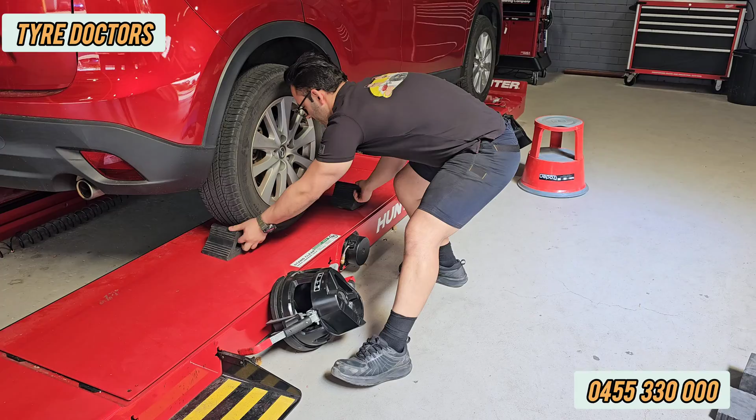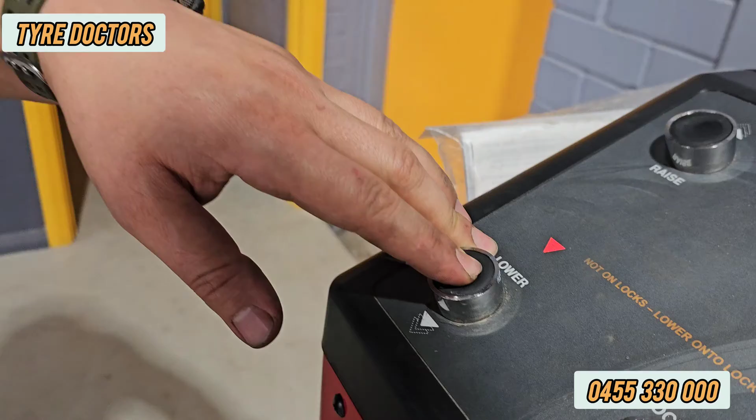Okay, now first thing you do, put the stoppers on a tire, so to prevent any rolling. That's great. Now we take the car a little bit higher. I'll show you how the remote works. So we need to raise it a little bit. You just press this 1, 2, 3. So on step 3, I press the lower, this one, to get locked. And it's level. If you don't press it completely, there will be an arrow here and it says it's not on locks, so you need to make sure it's completely locked.

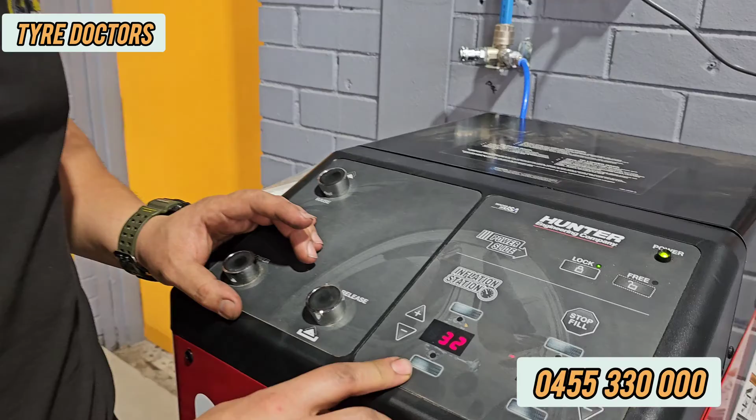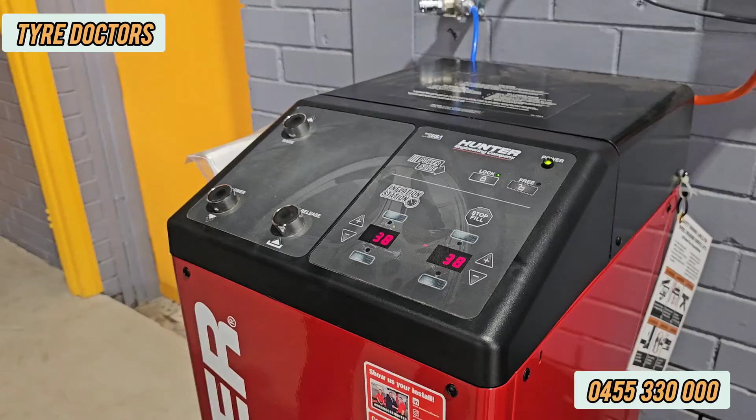First thing we should do now is the air pressure. So there's an inflation station here. So on this car we go on 38, for example, psi at the front and rear. Yeah, and now we have to connect them. It's really easy and handy.

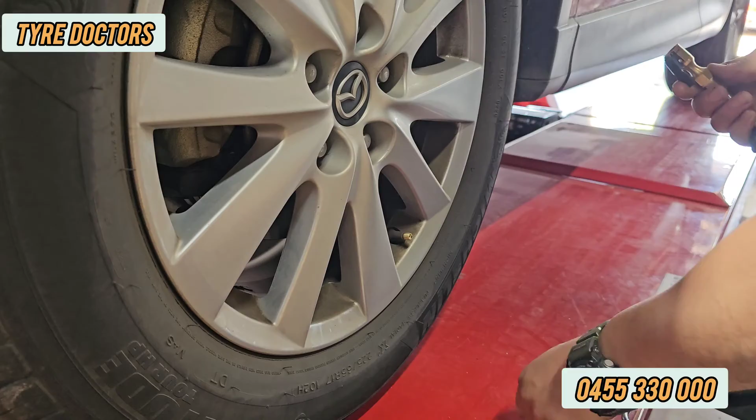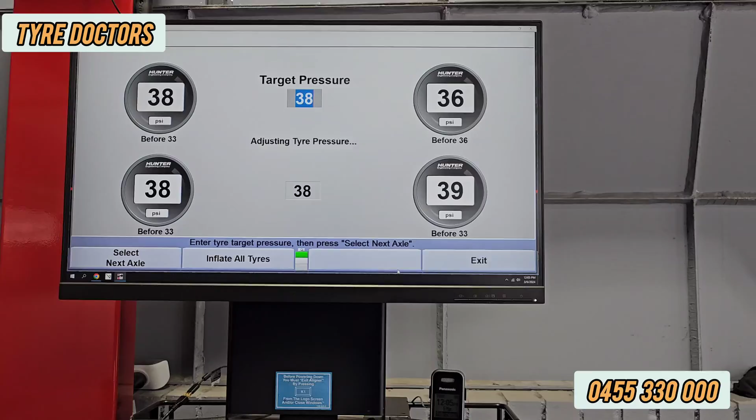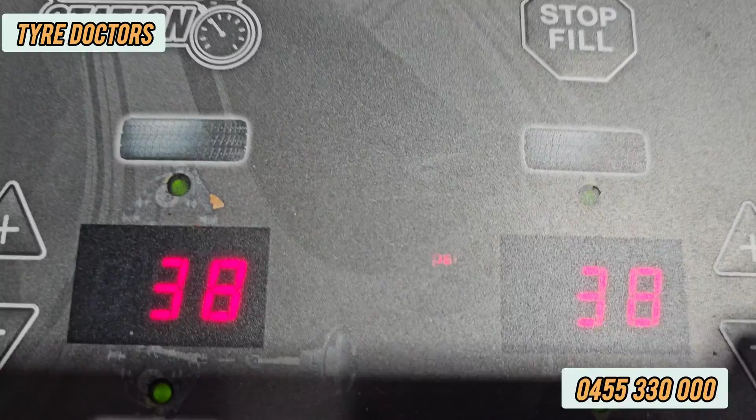Go to next. Last one. If you get the combination of Hunter machines, it will even show over there the tire pressure for each tire actually. When it's finished, the desktop will be like that, and even there's an indicator over there on a remote which shows by the light of the yellow and green. So when it's green, it means it's done. Now we take them off. So this one, you have to just pull it once and it goes in.

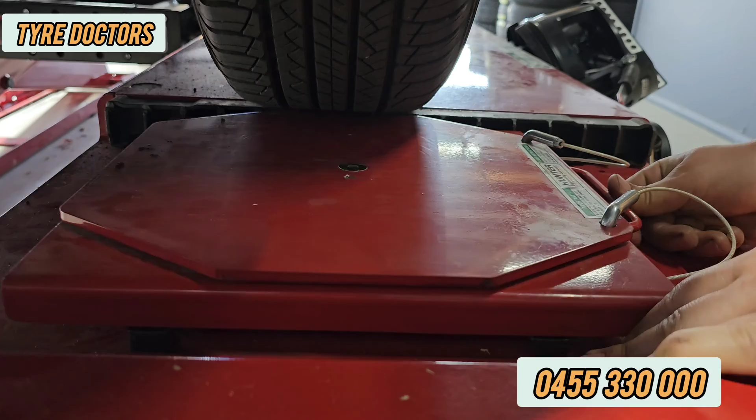Three. Plate positions. I didn't have the chance to get the automatic one. The rear is auto, but the front is not. And because it's not, I have to adjust this one. You see this one? Make sure you put that one at the center of the tire. Yep, and we do the same for the other side. That's it.

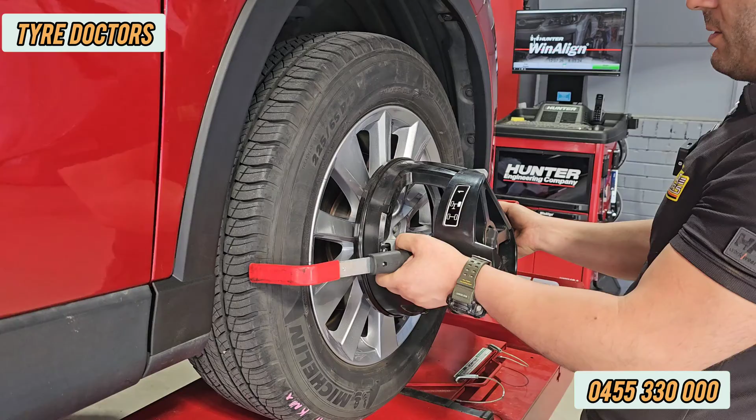Now we can put the cameras on. So for putting the camera, it's really easy. Try to put it at the center and straight. You'll get the better result. And the lock is easy. Just for unlocking, you press this one up. For locking, press it down. And make sure you put it on a gap so it doesn't come off. We do that for all of them.

When you lock it, make sure it doesn't move. If it moves, you need to tighten more, like push this one forward and put it at another gap.

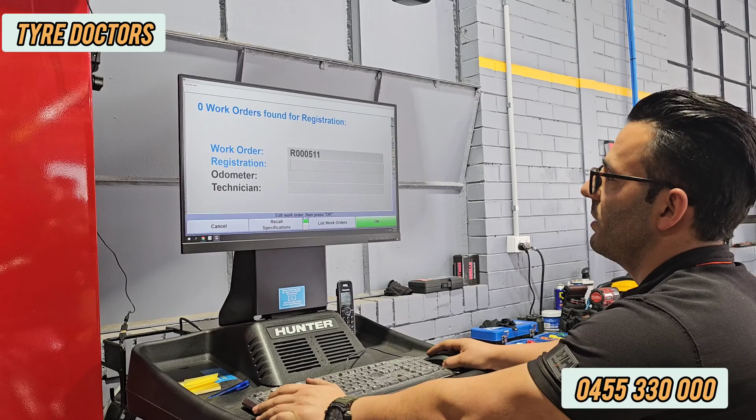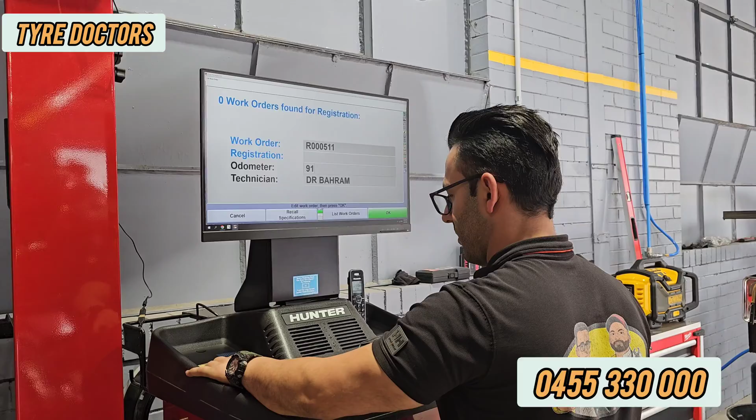Done. So it's the time to put the information on. So we press begin alignment. Here we have the registration, odometer and technician. Dr. Bahram. I am a doctor. We press OK, and then choosing the model, Mazda.

If I press M, A, Mazda is here. So we have two types of Mazda, which the second one is for America. So we look for Mazda CX5. CX5 is here. Press that. Now we check for the date. Date should be here.

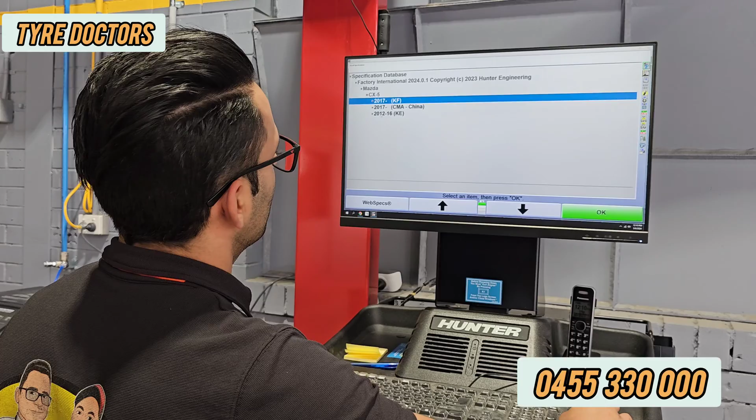The 2015. July 15. So that means we have three options here. So 2012 to 16. That's the only option we have. We open it. And now we have to make sure it's all-wheel drive or front-wheel drive. So this guy's a front-wheel drive.

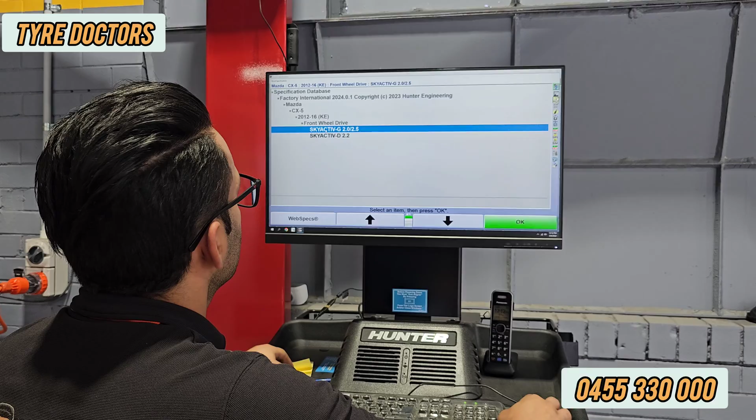Front-wheel drive. And now this one is a 2-liter. I choose this one. We've already done the sensors, the cameras. We press this. As you can see, we have a camera here as well, so that picture comes on the report paper showing that we've done the job.

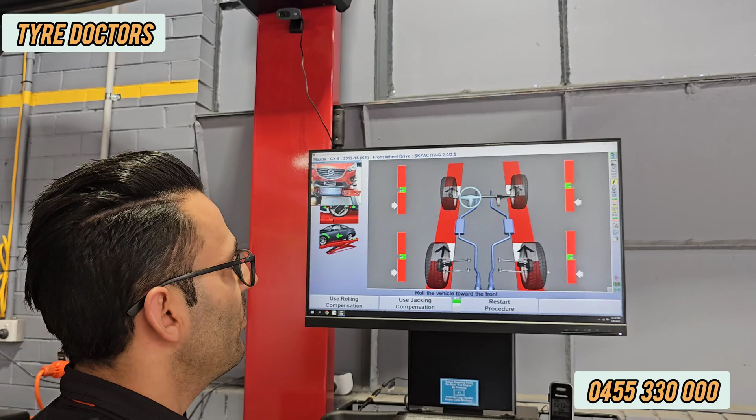Now is the time to move the car forward. Roll it forward. For rolling the car, make sure you use this tire, this wheel, and make sure you don't cover the cameras. So you take the top and here for rolling. So first thing, we take the stopper out. We put our hand here and gently we move it forward. Make sure the front tire goes on the center of that plate.

When you stay there, the machine will take a picture of the car and automatically it will unlock this one, the plate at the rear. The front, as I said, is not auto for us. Otherwise, that one could be unlocked too. We put the stopper back.

Now is the time for putting the handbrake on. So we open. As I said, make sure you're so gentle. I use that step, it's really handy. Press the brake pedal like that. We put it like that. It's locked now. Make sure you do the handbrake and put the gear in P as well. Now it's locked and it's on park.

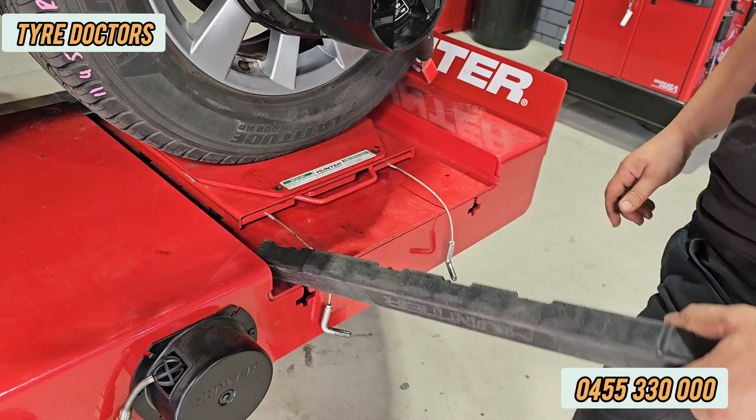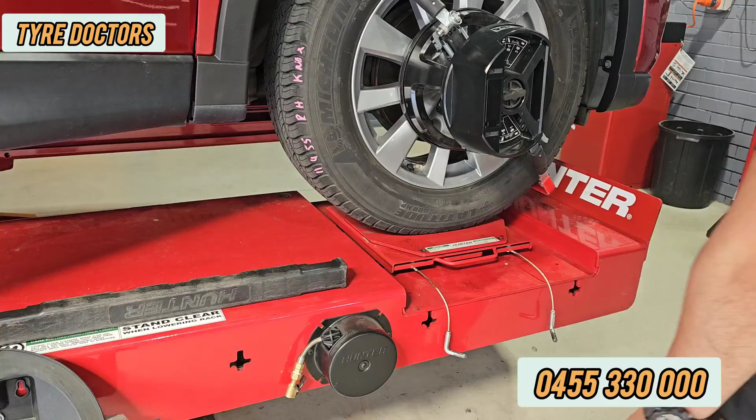So now it's the time to take the pins off. Easy. Make sure you take this black plastic one out as well. So when you do the caster and you turn right and left, if you don't take this one off, this one will hit that one and it will change a lot of things. We do the same for the other side. Take the pins off. Put this one. Time to do the caster now. So gentle. Do not move the car.

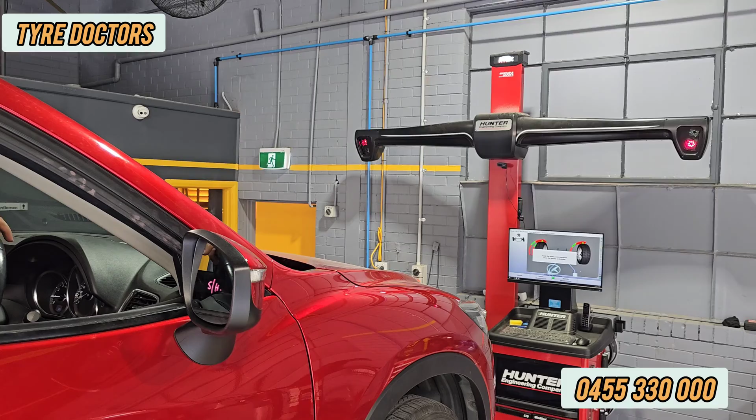So now we switch the car on. As we go with the machine, it says turn left to the green zone. We turn to left, to there. Now it asks for right. Okay. And now center. The center one is more sensitive. And now is the time to visually check the steering wheel and make sure it's straight. Now it's straight. Now we can switch the car off.

As you can see, the front right one is out, but we check everything after that. The front right one is not good. Now it's the time to lock the steering wheel. We got this locker here. Open the door so you can see how to lock it. So gentle. So we press it down on the seat. Make sure you don't move the steering wheel when you lock it. Now it's holding the steering wheel and it's locked. Close the door gently. Now we lift the car up.

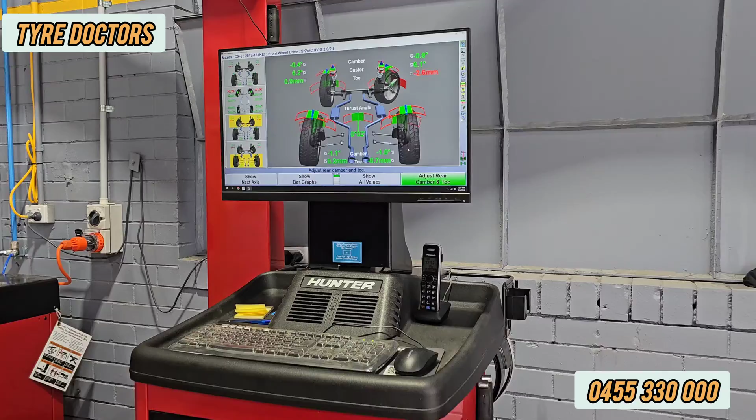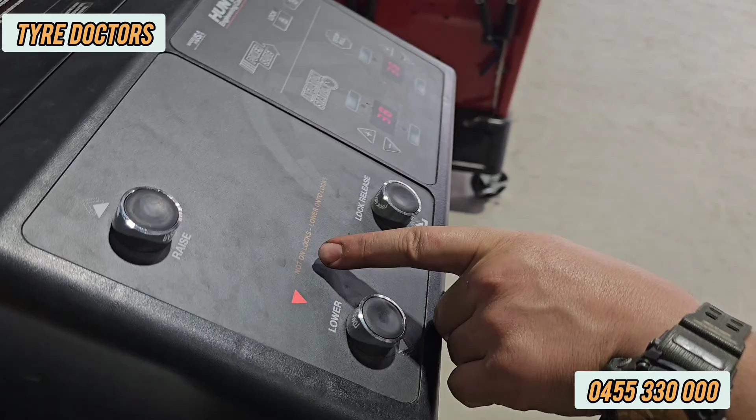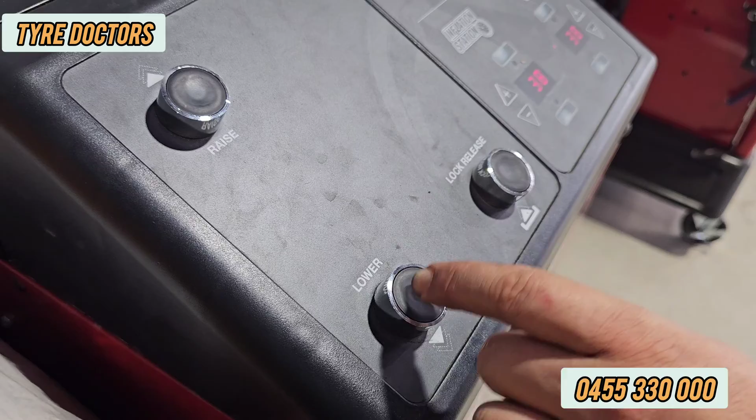Okay, now I've reached the height. If you look at this one here, the arrow, it will tell you not locked, lower onto locks. So that means we didn't lock it. We always have to lock it. So we press this one. Now the arrow is gone. That means it's locked and it's perfect.

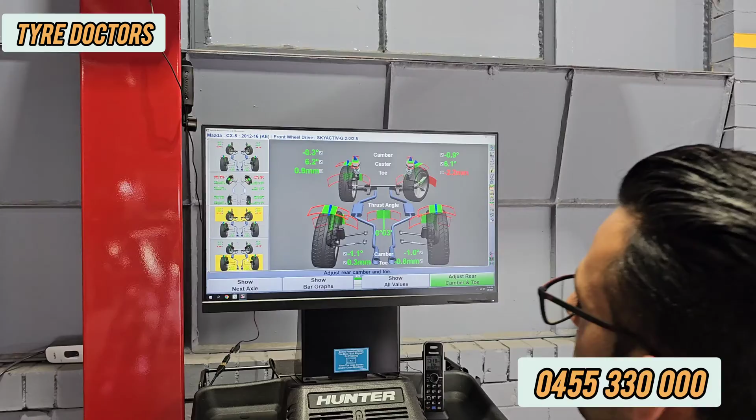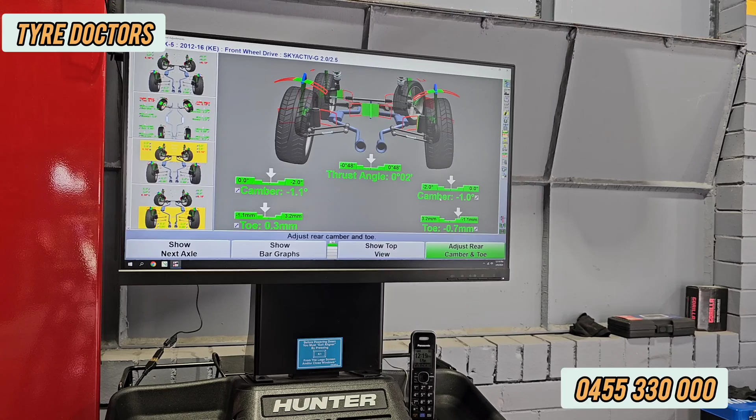First thing we do is the rear tires. So that's the total. We press this one. You can use the bar graphs as well, but my favorite is that one, to be honest. You can choose whatever you want, but I like this one. So as you can see, the camber is alright. The toe is a little bit out. I'll fix this one. The camber is out, but there's no adjustment for this car. Obviously, we can't do anything. But for toe, the center is here.

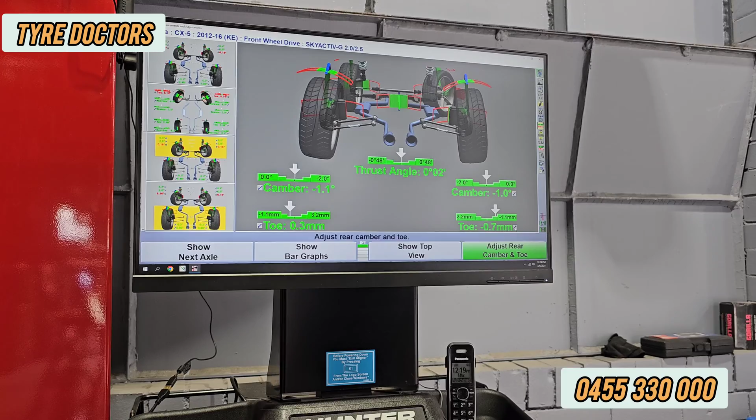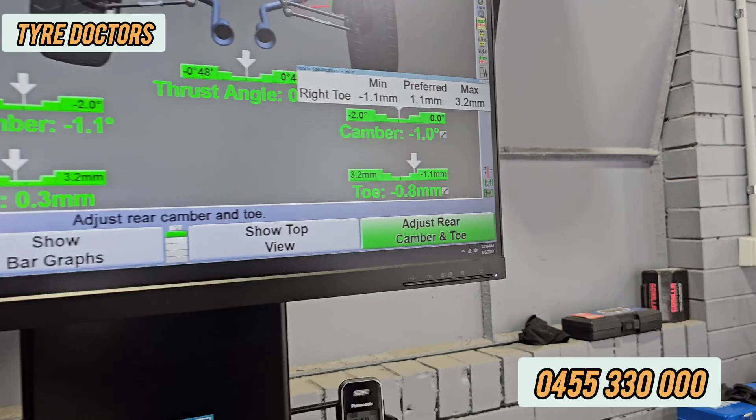I'll show you how to check the perfect one or preferred one. We press that tool here. When you press it on the top, it says show vehicle specification. So you click that one. And here it says preferred. Preferred is 1.1, but the tolerance is from minus 1.1 to 3.2. It's good, but it's just OCD. I love to do it perfect. So let's do this one at 1.1.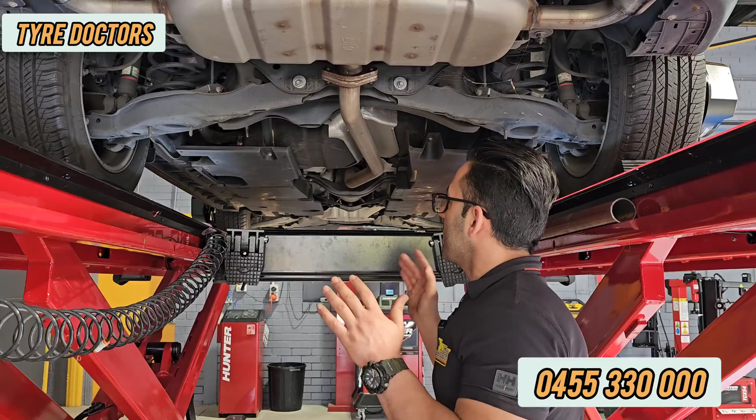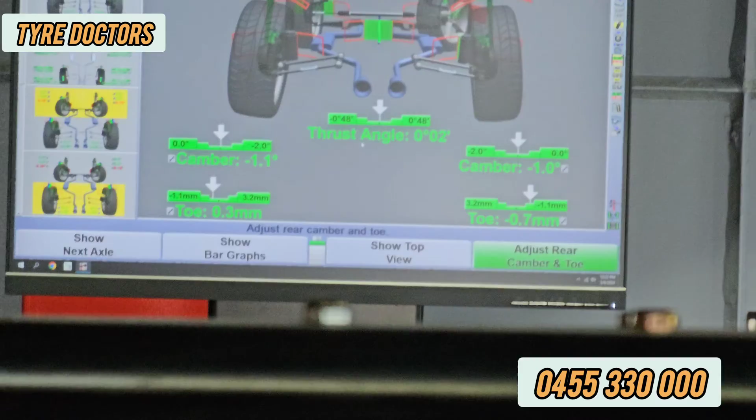Obviously this car doesn't have camber adjustment, but toe for this car is this one. That's for the left side, and that's for the right side. Now we open this one. 17. And we spin the other side to reach 1.1. As you can see, it's changing. Wrong. Okay, 1. We tightened it a little bit, not completely, to do the other side as well. Sometimes when you change the other side, this side will change too. That's why it's better not to tighten it completely. No.

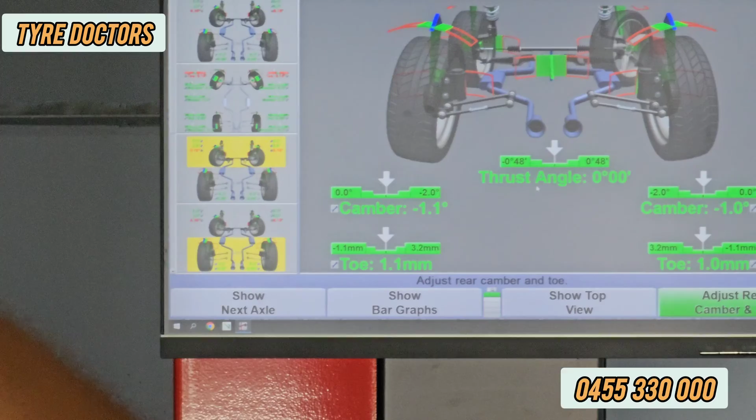Okay. 1.1. And we tie this one completely. That's good. This side is good too. So we tied this one as well.

One thing you should know is you're not gonna make it perfect ever. Not ever, sometimes it happens. But it's live and it moves. So 0.1, 0.2, 0.3 is nothing, yeah? So don't be so fussy. Now it's tied. So easy, we did the rear. We go to the front now.

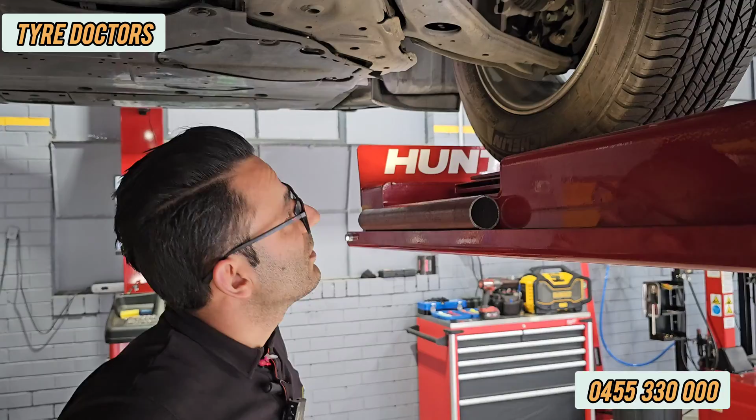For the front, that's the tie rod. So we need to open that one and obviously spin that one. Now we go to check the front. So we have to press the front now. So the rear is like that now. We go to the front. This one is out, obviously. We check the perfect one.

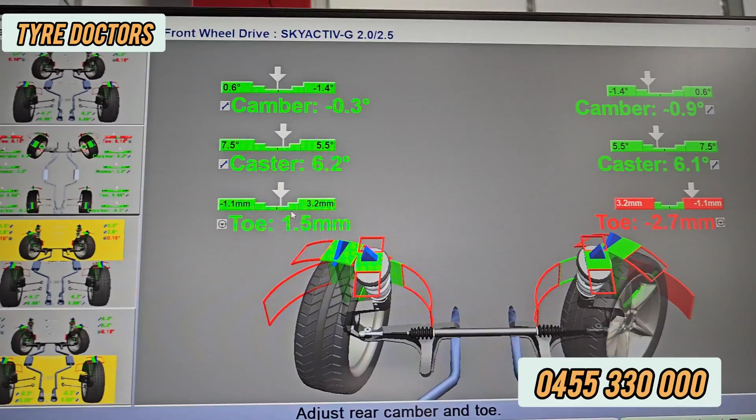It's 1.1 again. So we do this one first. Sometimes this one gets fixed. So let's see how we go. Okay, so we need 21 and 13. Okay, so we open this one. Try to not move the car when you open the bolts or the nuts.

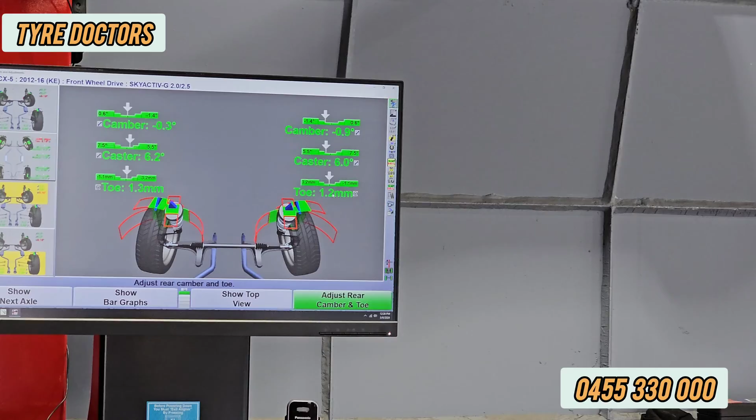Now we loosen this one and we have to turn this one upside. As you can see, it's turning. Yep. Now we don't have to open the other side. That's good. So if you remember, you need to always do the side that is worst. That will make your job much easier.

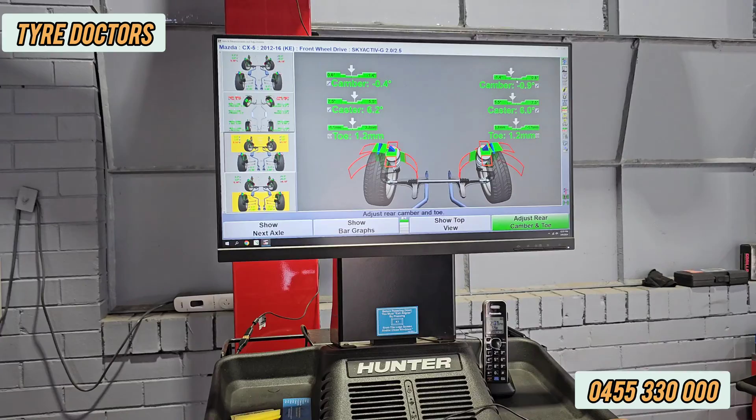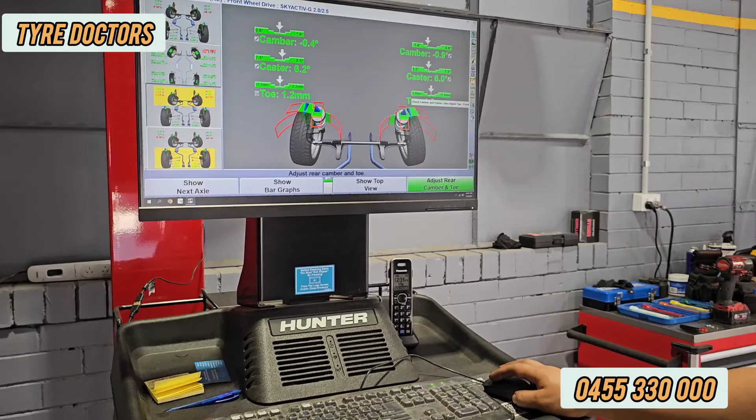Now, as you can see, it's perfect. So this car doesn't have adjustment at the front except the tie rod. So camber and caster, as you can see, I don't like it, but we can't do nothing. There's no adjustment for it. Now, it's the time for the last step, is the print. Show it to customer.

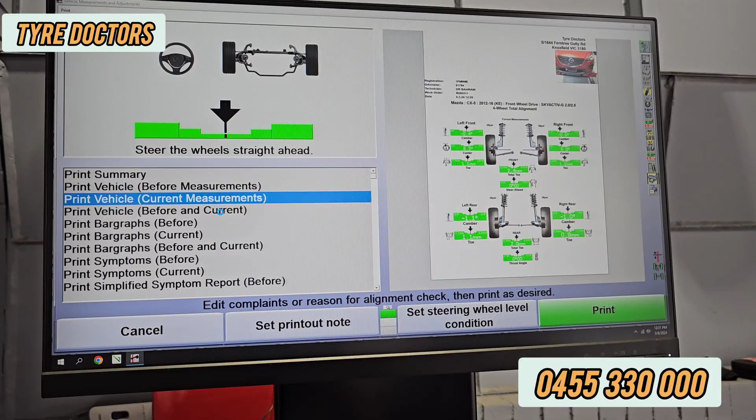There's an option here, before and after. As you can see, the front right was bad. Now we print it. It's been tied and it's done. Now it's the time to take the car down and go for a test drive. Down a little bit to take the cameras off. For taking the car down, we raise it up a little bit.

Done. We press this one, it says lock release. When we press that one, we have to hold that one and press the lower. So we take the car down as much as we don't bend. I'll take the cameras off. Another good thing about Hunter is you can put the cameras here, so handy. You don't have to turn around the car or go somewhere to bring them.

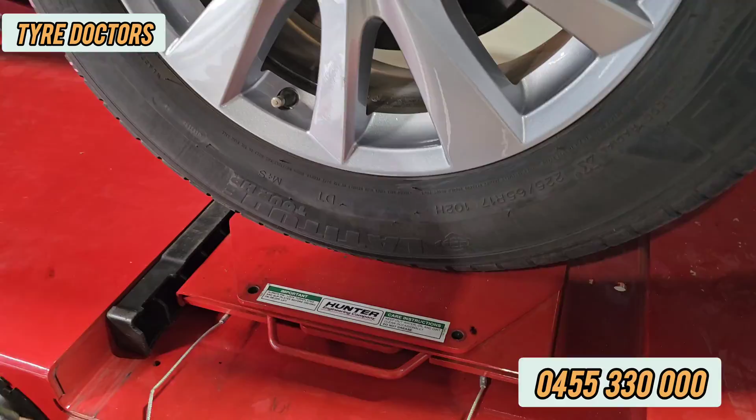Take all of these things back, put the pins back. Yeah. This one here, need all of them. Take the stoppers off as well. Nothing's gonna happen. Some brake. And off. That's all good. Make sure that nothing's under. Now this lift at a point stops for safety, so you need to press it again down.

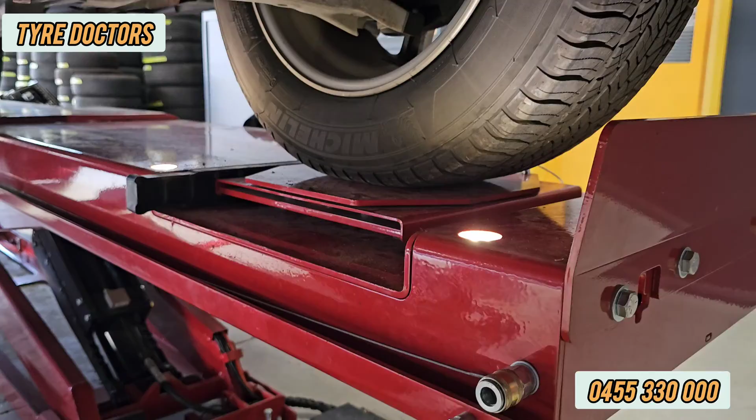Another option this hoist has, which I forgot to show you, is the light. So the light, when it reaches like 2-3 steps, the light comes on automatically. So the light at the height goes off or on by itself. We don't need to press anything.

We press the release button and we press down. As you can see, it stops at the point. And again, press the lower button. So it goes completely down. That's for safety. Now we take the steering wheel lock and the handbrake lock off. And we go for a test drive and see how we go.

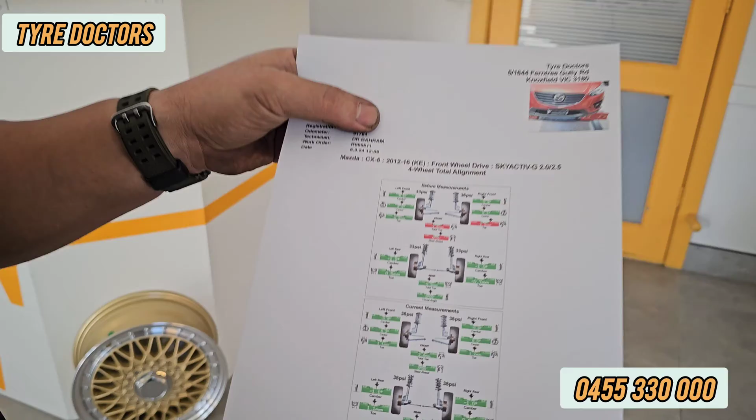We did the test drive and the car goes perfect, but I'm gonna show you the paper, how it looks like. So that's how the print looks like. That's before and that's after, and that's a picture of the car. Even it shows the PSI, the air pressure. As you can see, it was 33 before, 36, yeah, and now all of them are 36.

Okay, thanks for watching this video. We try to show you how to do wheel alignment on different cars as well.